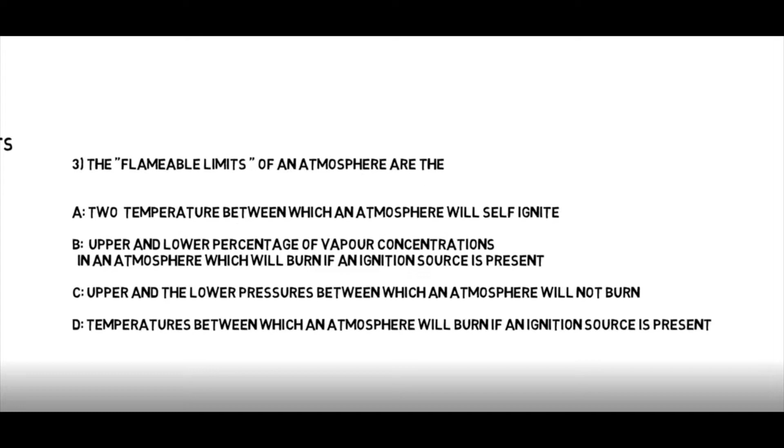Question number 3. The flammable limits of an atmosphere are the upper and lower percentage of vapor concentration in an atmosphere. Question 4. Fire in a pile of linen is considered to be which class? Answer is A class fire.

Question number 5. Why is carbon dioxide better than dry chemical? The dry chemical leaves the residue. Question number 6. Fire involving combustible metals are classified as Class D fire.

Question number 7. A Class C fire would be burning. Correct answer is electrical installation. Question number 8. All of the following are parts of fire triangle except. Correct answer is electricity.

Question number 9. Control valves for a CO2 fire extinguisher system may be located within protected space when the CO2 cylinders are also in the space. Question number 10.

Burning electrical insulation is best extinguished by. Correct answer is carbon dioxide.

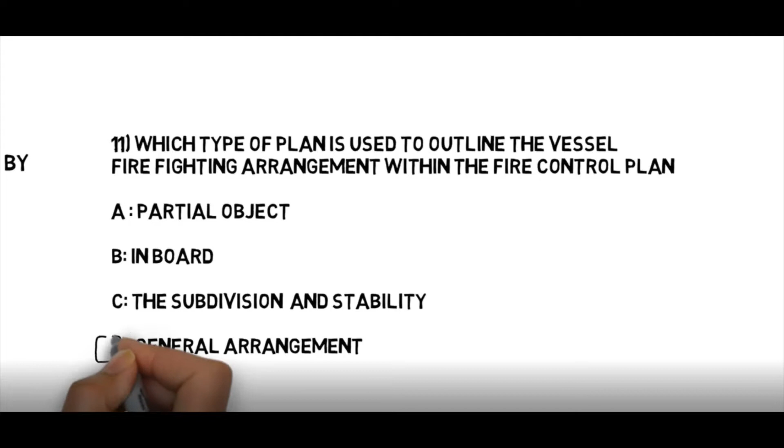Question number 11. Which type of plan is used to outline the vessel's firefighting arrangements within the fire control plan? General arrangement plan. Question number 12.

Fusible link dampers are operated by. Correct answer is the heat of a fire melting the link.

Question number 13. Fire is considered under control when. Correct answer is the fire is contained and no longer exists or spreading.

Question number 14. Emergency stations on board your vessel can be found on the ship's muster list.

Question number 15. When using foam fire extinguisher on the fire in the engine room, the best way is direct the foam on the bulkhead behind the fire and let it slowly spread.

Question number 16. Burning of paper, cloth and waste material can be classified as Class A type.

Question number 17. Minimum duration of SCBA is. Correct answer is 20 minutes.

Question number 18. Which kind of fire extinguisher is best for fighting type A fire? Correct answer is water type extinguishers.

Question number 19. When fighting fire caused by cooking oil, which extinguisher you should not use? Correct answer is water and DCP both.

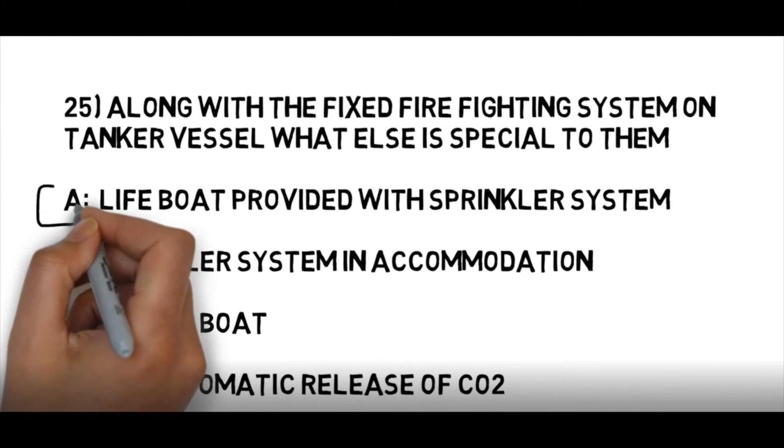Question number 26. When human body is exposed to carbon monoxide, more oxygen goes to blood. False.

Question number 27. As per regulation, how many portable extinguishers should be there on board? Correct answer is 5. Question number 28.

For B-class bulkheads, the duration of not exceeding the temperature above 200 degrees Celsius is 30 minutes. False. Question number 29. Which type of portable fire extinguishers are designed for use on electrical fires?

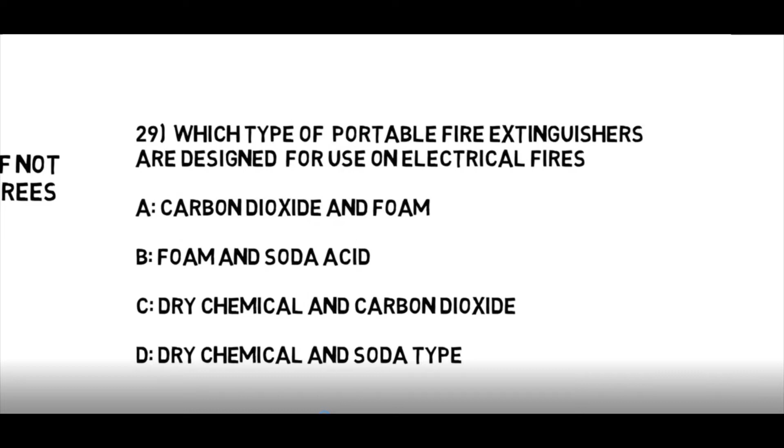Answer is dry chemical and carbon dioxide.

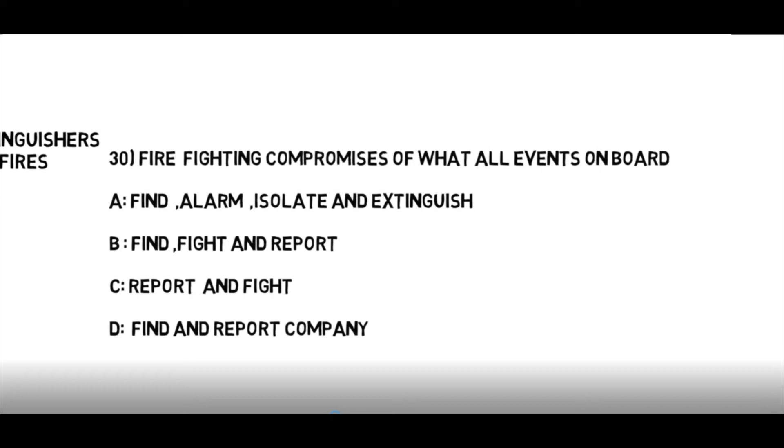Question number 30. Firefighting comprises of what all events on board? Correct answer is find, alarm, isolate and extinguish.

Question number 31. When fighting a fire in a confined space, which firefighting extinguisher you should not use?

CO2 type should not be used. Question number 32: During an investigation of fire, what point will be considered? Correct answer is all of the above.

Question number 33: When using CO2 type fire extinguisher, what is the way to use it? Aim low, pointing the nozzle or hose at the base of the fire.

Question number 34: Reason why CO2 extinguisher is preferred over others? They do less damage than others.

Question number 35: To fight Class C fire, you should use CO2 or? Correct answer is dry chemical.

Question number 36: Maximum weight of portable extinguisher is? Correct answer is 23 kilograms.

Question number 37: Onboard firefighting is done by? Correct answer is all of the above: cooling, smothering, starvation.

Question number 38: During fire on board, the communication is to be concise, precise and short.

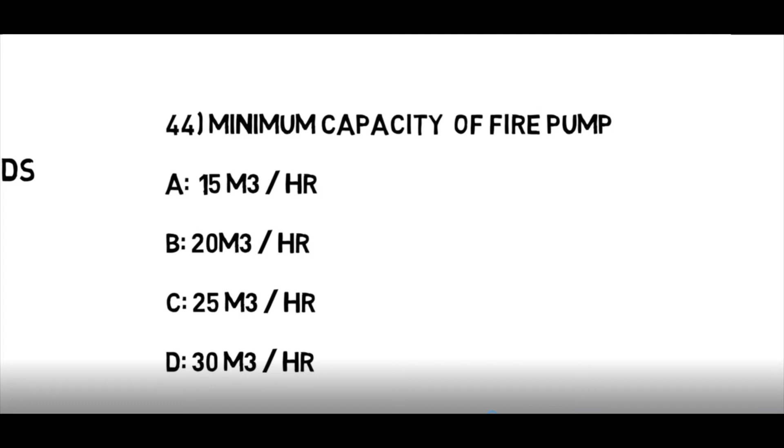Correct answer is 25 meter cube per hour. Question number 45: Which is the best fire extinguisher for electrical fire?

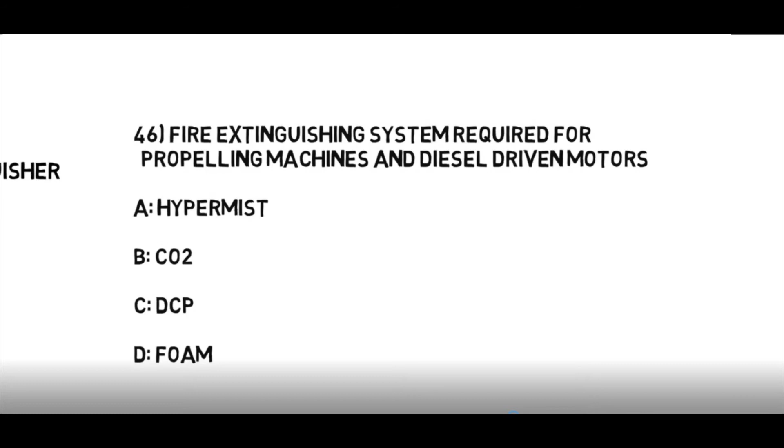Correct answer is CO2. Question number 46: Fire extinguishing system required for propelling machines and diesel driven motors is?

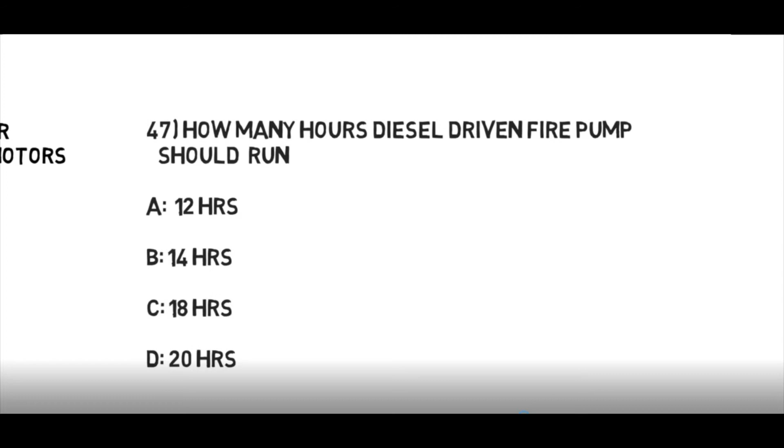Correct answer is hypermist. Question number 47: How many hours diesel driven fire pump should run?

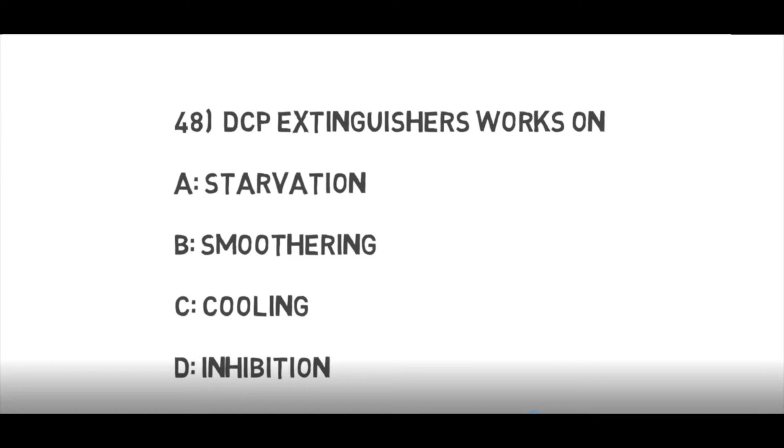Correct answer is 18 hours. Question number 48: DCP extinguisher works on? Correct answer is

inhibition. Question number 49: Class B bulkheads are classified as

B15/B0. True. Question number 50: Maximum temperature of an exposed side of B class division is?

Correct answer is 225 degrees centigrade. Question number 51: DCP fixed firefighting system is used in which type of vessels?

Correct answer is gas tankers. Question number 52: Class A fire

extinguishers is best used on? Correct answer is solids.

Question number 53: In which language fire control plan is on board? Correct answer is English. Question number 54:

Automatic CO2 release system is for which space? Correct answer is none of the above.

Question number 55: Meaning of PASS in portable fire extinguishers is pull, aim, squeeze and sweep.

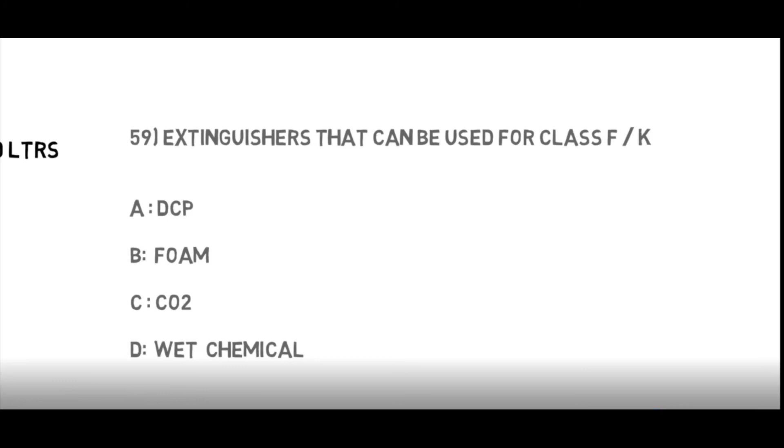Question number 59: Fire extinguishers that can be used for class F and K. Correct answer is wet chemical.

Question number 60: Oxygen removal. How it stops fire? Correct answer is smothering.

Question number 61: What is the fourth component of fire tetrahedron? Correct answer is molecular chain reaction.

Question number 62: Color coding of portable fire extinguishers is signal red. Question number 63: Which extinguisher is difficult to recharge on board?

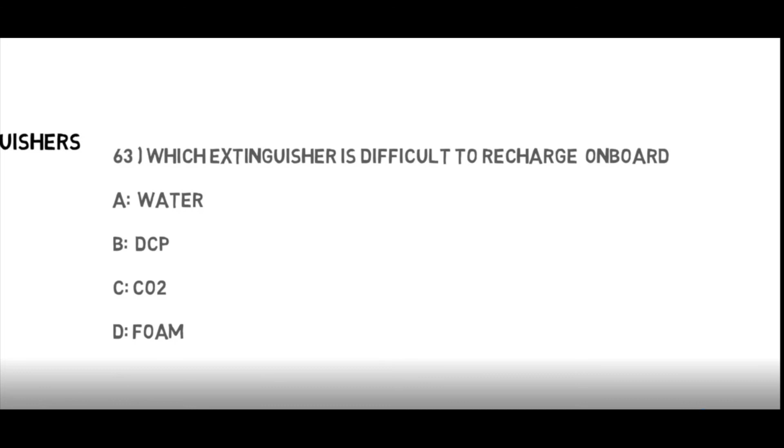Correct answer is CO2. Question number 64: What is the length of fireproof line of SCBA set?

Correct answer is 30 meters. Question number 65: Class D fire involves?

Correct answer is metals. Question number 66: Quantity of reserve fuel for fire pumps outside of machinery space sufficient for 15 hours at full capacity.

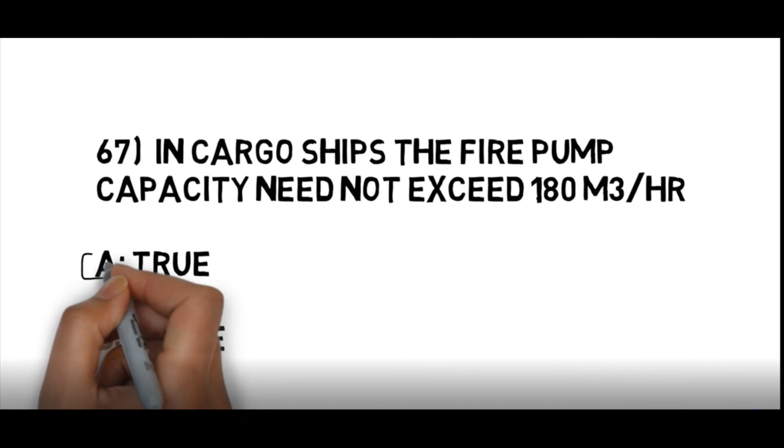Question number 67: In cargo ships, the fire pump capacity need not to exceed 180 cubic metres per hour. Correct. Question number 68: Inert gas system shall be capable of maintaining oxygen level in cargo tanks below 8% by

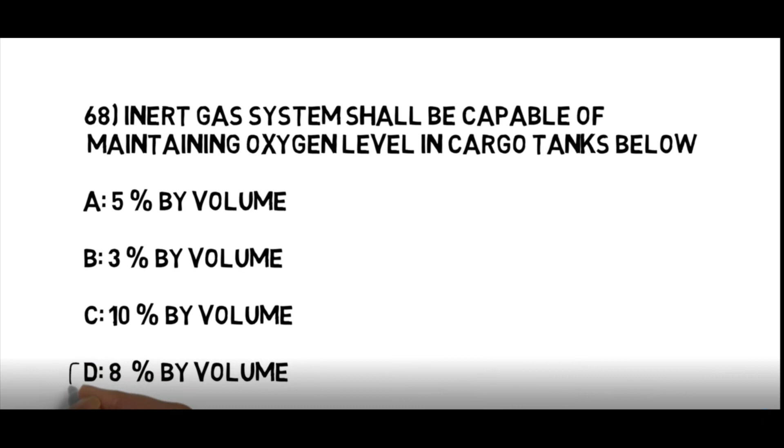volume. Question number 69: AFFF is also called as all-purpose foam. It's true.